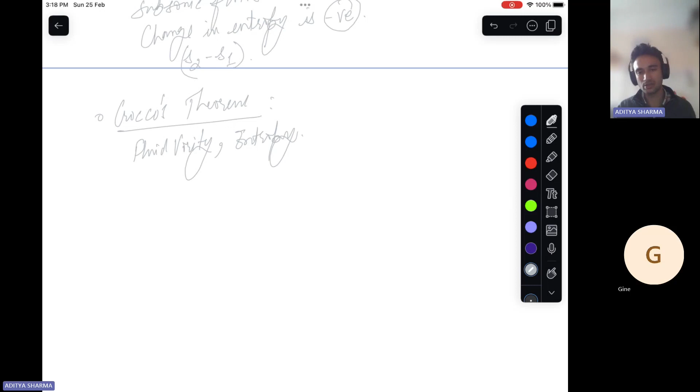The theorem mainly conveys that by just having these thermodynamic changes in the flow, we can predict the kinematic behavior of a flow. By kinematic, here we are concerned only with the rotationality or irrotationality of a flow. In the fundamental fluid dynamics course, we are introduced to whether a flow is rotational, irrotational, steady, or unsteady.

So vorticity is 2 times the angular velocity, and the angular velocity is this. I'm just writing the mathematical expression for this. Because we don't have any question based on these formulae in our assignment, we won't be practicing questions based on this, but we must know what these things are and be able to solve any problem based on these formulae. These concepts we should know.

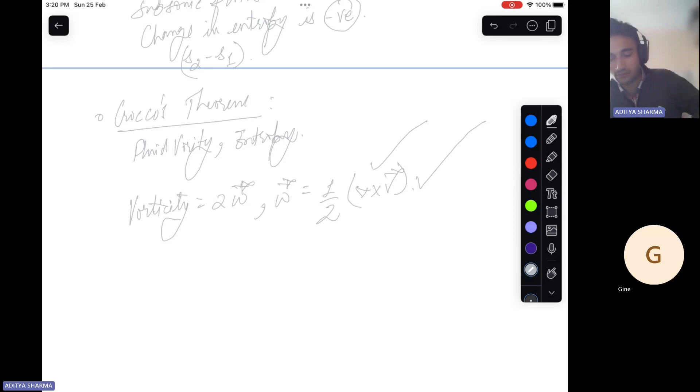Like the curl of velocity, how to find the curl of velocity, which is basically a vector operation. There is a cross product and a dot product; this is basically a cross product. We should know how to find a cross product so that we can move ahead if there is some problem related to this concept. Then there is this relation linked to this. I'll just write it so that we have an idea of what this equation looks like.

So this is the expression from Crocco's theorem. This is the enthalpy term and this is the entropy term, and we have related these with the velocity term. The velocity term means kinematics is involved in this particular theorem. This is the enthalpy term and this is the entropy term.

Then the gas property tables for normal shock relations were discussed. In week 4, we came across various relations related to normal shock waves. These were briefly pointed out in a slide at the end of lecture 12, and then a table based on those relations was presented by the professor. We have 4 numericals in assignment 5 based on these compressible flow and normal shock wave relations.

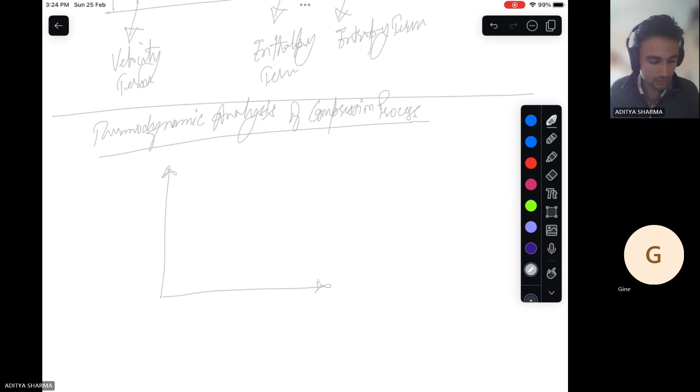Okay, so thermodynamic analysis of the compression process. Okay, right. So a graph has been given there, right? This was, I believe, the pressure and specific volume graph, and it was something like this. So it was something like this, right? So this was the polytropic process, being represented with this particular expression, right?

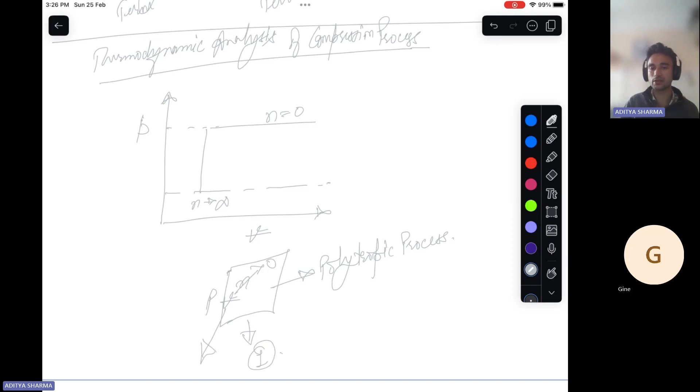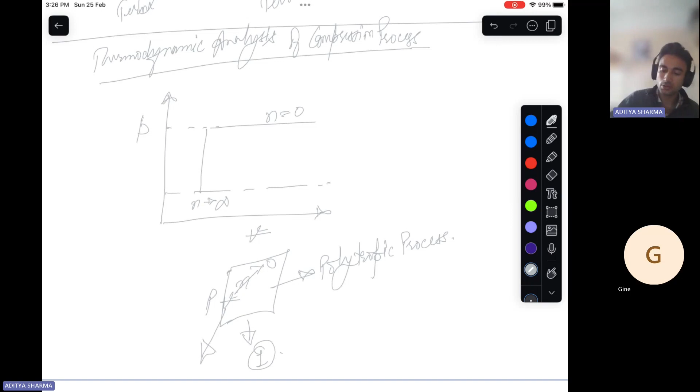So in that case, the value of n decides the behavior of the gas in the flow. So that has been discussed in this particular topic, right? So for example, if n is zero, then this whole term becomes one, right? So in that case, there is no use of including v in this expression. It becomes independent of v. So this expression corresponds to a process that is isobaric in nature. In this fashion, different processes have been discussed in this slide, right? Okay.

So like I was just telling, we have started seeing the shock wave as a compression medium. This has been discussed in this particular heading of lecture 13. And then the professor moved on to the Hugoniot relation, right? So the Hugoniot relation is basically nothing but trying to find the ratios of properties of the flow across the shock, upstream and downstream of the shock.

And one important thing about this Hugoniot relation is that here we are not taking help of either Mach number or velocity, right? So we are not using velocity or Mach number to get to the ratios of the properties upstream and downstream of a normal shock. So this is the Hugoniot relation.

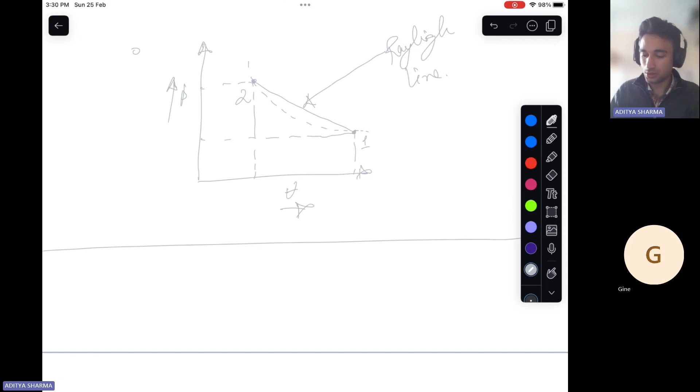Okay, all right. So now I believe we should move on to our questions, because this brief discussion of the topics covered has been done. Then the last topic was isentropic compression versus shockwave compression. In this, nothing special has been done. Graphically it has been shown how the two processes differ from each other, right? So if these are the two processes, the continuous one is the isentropic compression, and this one is the Rayleigh curve, right?

This one is a Rayleigh curve, with point 1 and point 2. The discussion we are having is only across a normal shock. So in this case, if there is compression, how the compression will be in the real case, and how it will be in the ideal, isentropic case, this has been discussed. All right. So let's move on to the questions.

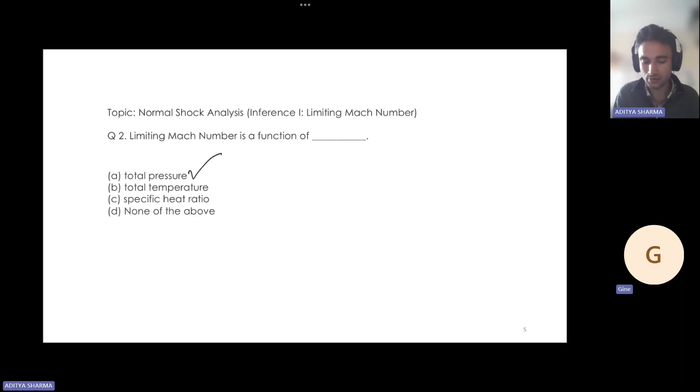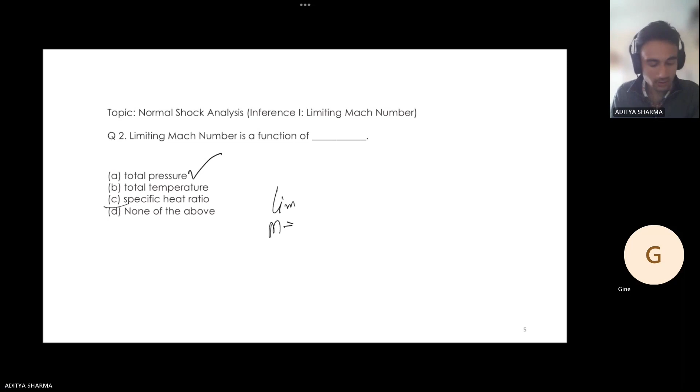Specific heat ratio, C. Okay, you say C. Right. So what is the expression for limiting Mach number? I have just mentioned it. For the sake of recording, I'll mention it again so that you can directly refer to this. So this is the expression, right? This is nothing but the specific heat ratio. So the correct answer obviously is C, right?

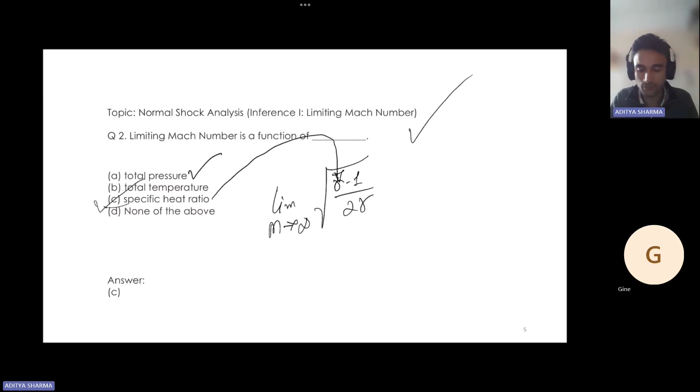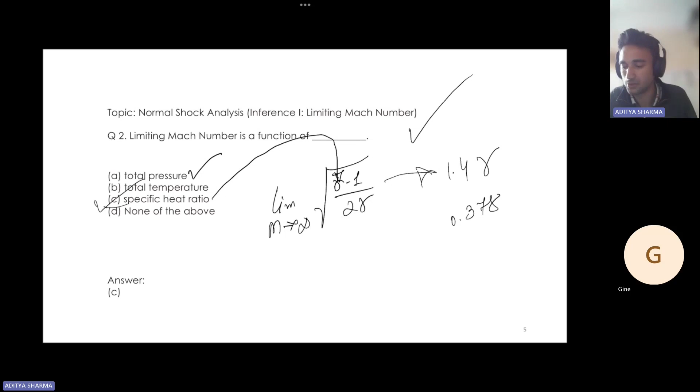Okay, so let's move on to the next question. So the thing is, you keep the Mach number at whatever high value you want, but there is one limit below which it won't be in the capacity of the strength of the shock to lower the Mach number downstream of the shock. So for a gamma value of 1.4, this is 0.378, right? This I have already mentioned. This also I have just mentioned.

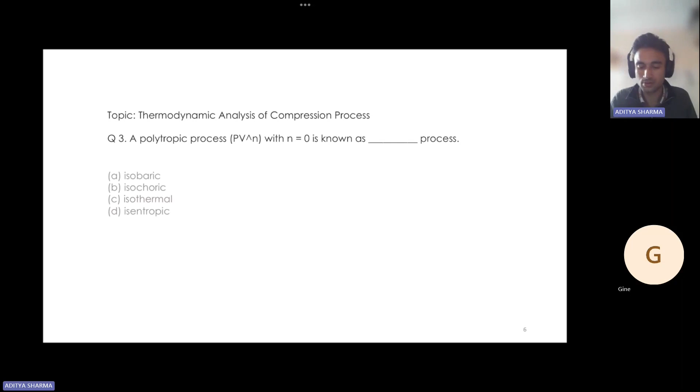So there are polytropic processes like this, and this is n equals 0. Let's suppose this is n equals 1, this is 2, and this is 3, right? And this is n infinity. So PV^n equals constant. This is the polytropic expression.

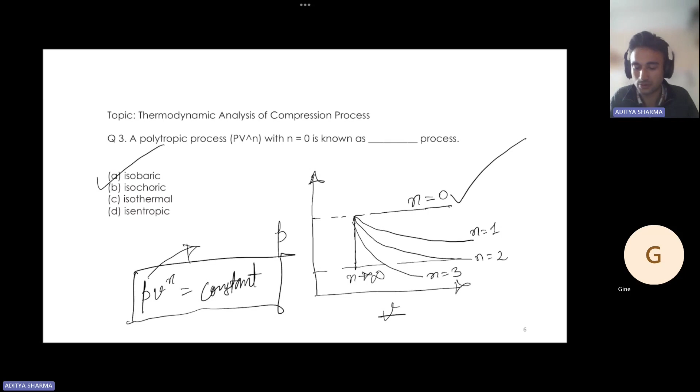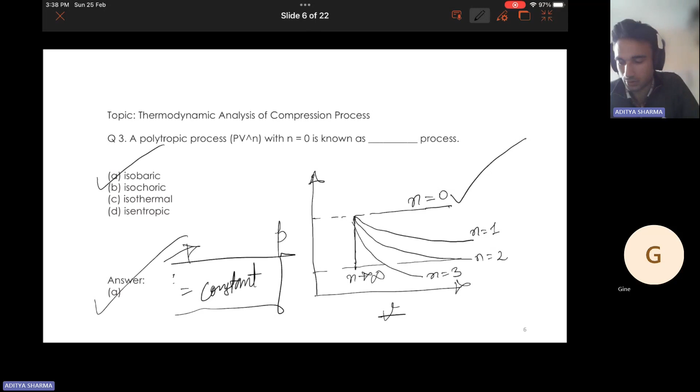So for this case, it will be A, right? Isobaric. So in this process, whatever the volume of the process, the pressure will remain constant. So this is our answer, right? You see this. Sir, A. Okay, right. Thank you. So, go on to the next question.

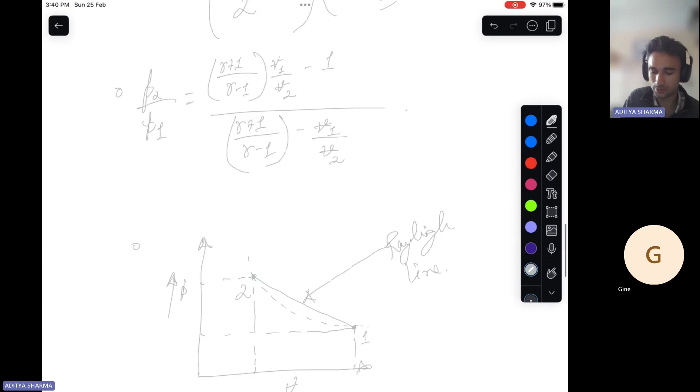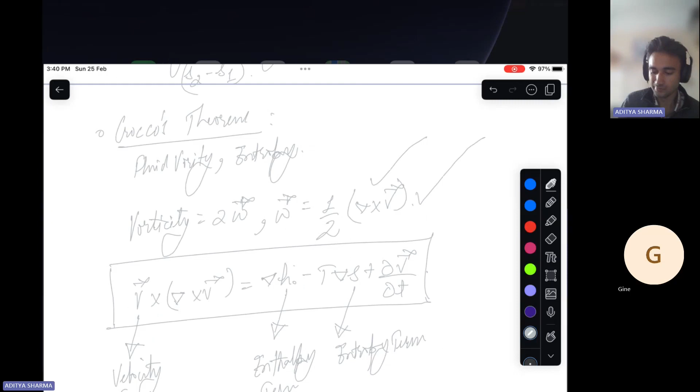So when the flow has a gradient of enthalpy and entropy, the flow will be rotational, right? We just saw this expression. This is Crocco's theorem. So D option is correct. Then let's move on to the next question.

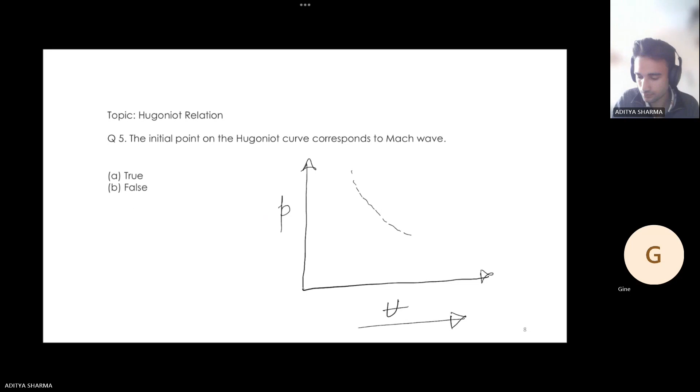Okay. The initial point on the Hugoniot curve corresponds to a Mach wave. Let me first draw a Hugoniot curve. All right. So this is our Hugoniot curve. With reference to this curve, the initial point will correspond to a Mach wave. Is this statement right or not? True. A. Right. So this graph I am showing for some random normal shock.

But we know that we get a Mach wave when the flow has just become supersonic, when the Mach value has just reached 1. So in that case, across this Mach wave, what properties change? These changes are very feeble, very weak. And on this Hugoniot curve, the initial point corresponds to the Mach wave only. So yes, this is also true.

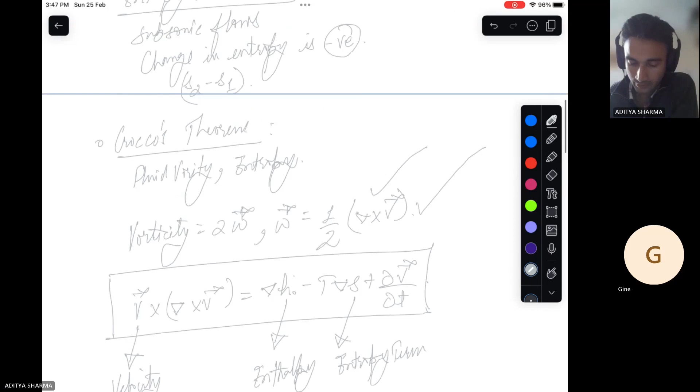Right. So I have just discussed also, right? So in a subsonic flow, the entropy decreases from this. I have not written it, but I should. Let's just write this expression. So this is question number 6, right? So the expression for this entropy change is Cp ln... this is some function of, or maybe I should just write some function of M1.

This is a function of gamma, R and M1, right? So this is this, but then if your M is less than 1, in that case s2 minus s1 will be negative, which is thermodynamically not possible. So this statement is false, and it is not possible to do so. Right? Okay.

Now, we have these numericals from question number 7 to 10. First of all, I want you to please note down these values, and based on that only we shall proceed further. So I'll also note down these values for question number 7 to 10. All right. So upstream of normal shock, values are given. V1 is given as 1500 meter per second.

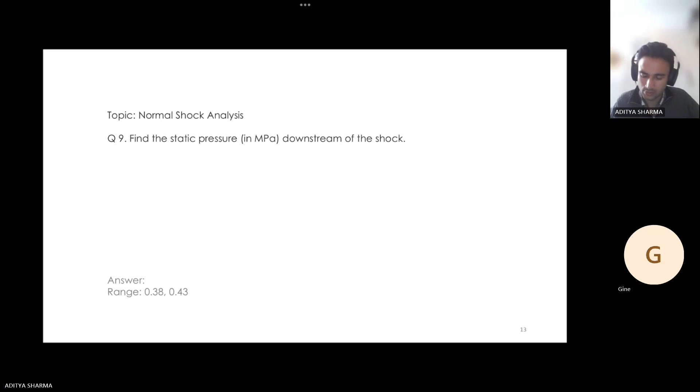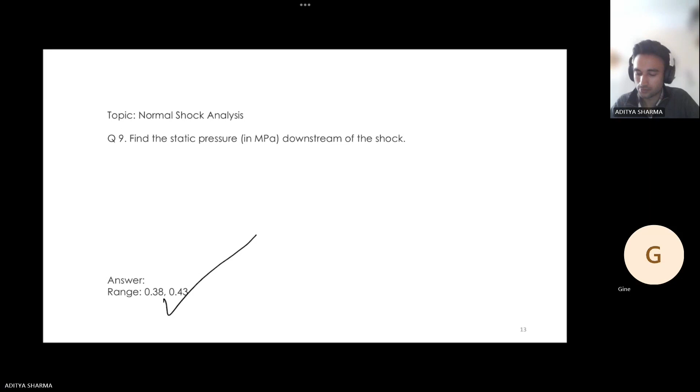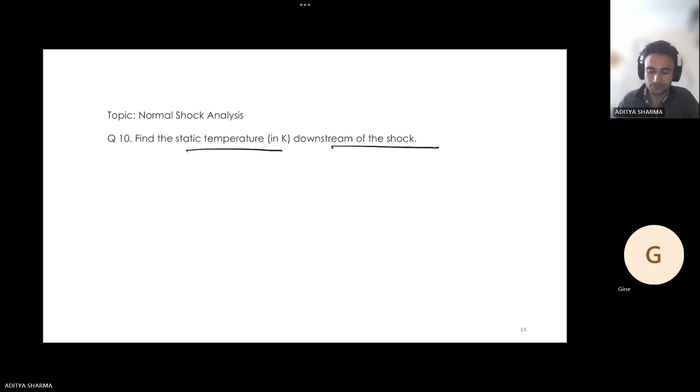So this was question number 9, and our answer fell in this range. All right, let's see the next question: find the static temperature downstream of the shock. Let's solve this. So how do we do this?

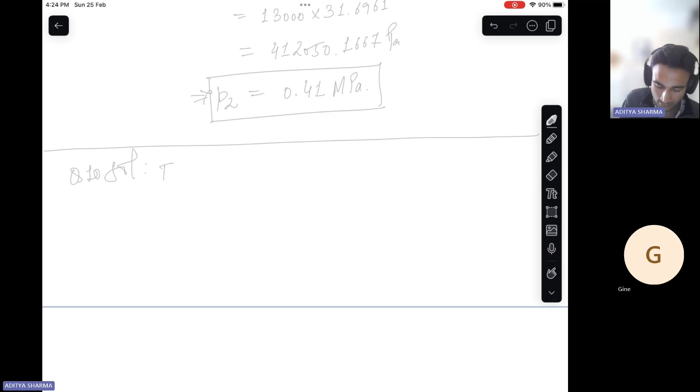Right. So we have this value of this expression, right? 1 plus 2 gamma by gamma plus 1, 2 plus gamma minus 1, gamma plus 1 square.

So T2 by T1 equals to 1 plus 2 into 1.4 by 1.4 plus 1, right? M1 square is 5.226 square minus 1, right? And then this is 2 plus 1.4 minus 1 into 5.226 square by 1.4 plus 1 into 5.226 square. Please let me know if there's some mistake in this particular expression.

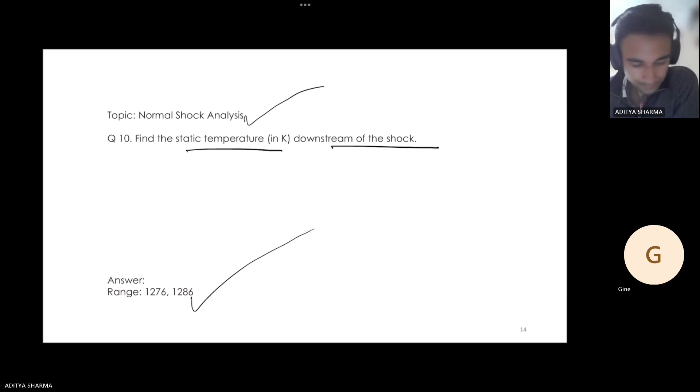So now we are done with 10 questions, right, of the session. So, all right. So let's move on to some extra questions, right? It's because there are 10 questions asked in your assignment. So I just prepared the first 10 questions and then I thought I should keep the additional questions in the next section of these slides, right? So

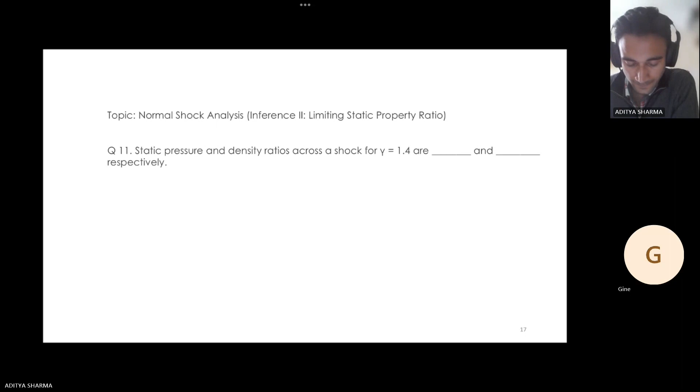we have this question from lecture 12, right? From lecture 12, the first lecture of this week, and from there, sorry, the first topic, right? So normal shock analysis, and from there also this limiting static property ratio topic. So the question is the static pressure and density ratios across a shock for gamma equals to 1.4 are

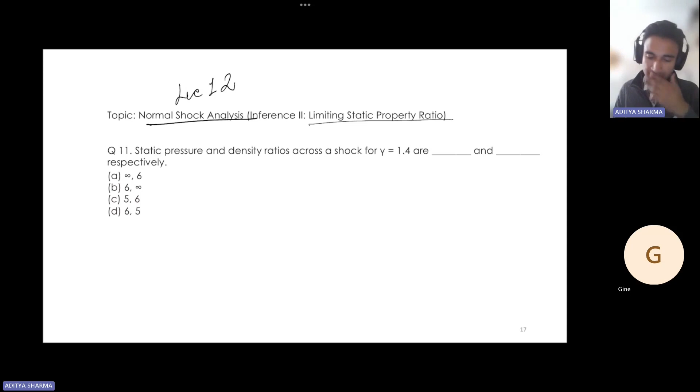So let's first of all see, because we are left with half an hour, so we can just, okay. So what has been asked? Static pressure has been asked, and static density has been asked. So I believe I have discussed these in the topics covered, right? So this is nothing but limiting pressure, right? This is infinity, and this is limiting what? Density.

So in any case, the ratio won't be beyond this value, right? So this is nothing but 1.4 plus 1 divided by 1.4 minus 1, which is 2.4 divided by 0.4, which is 6, right?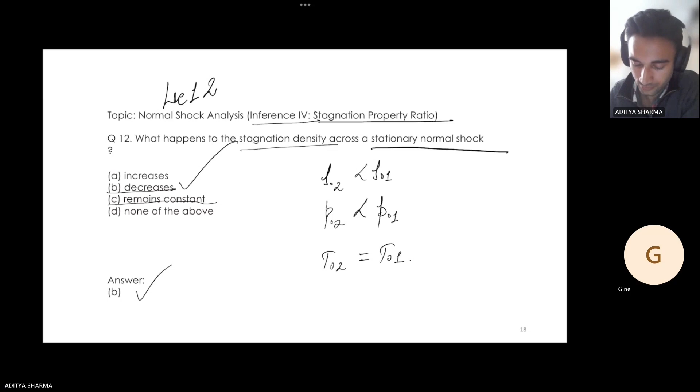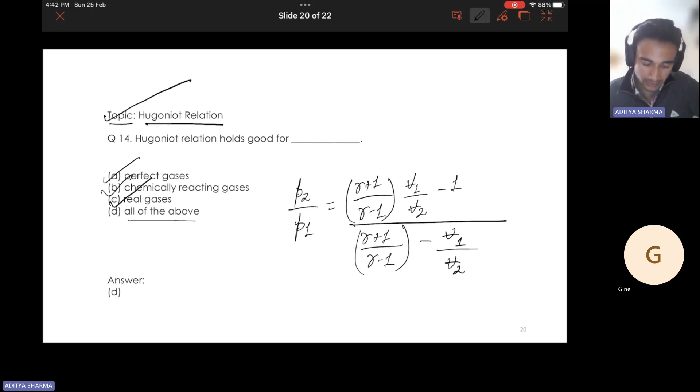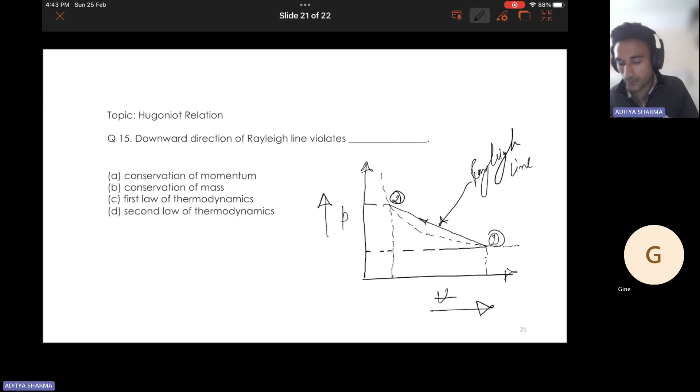Right. So this. So I have discussed this, right? So this is this. This is this. So this is the Hugoniot curve, right? This is state 1, this is state 2. And then if you join this, this is the Rayleigh line. Yes.

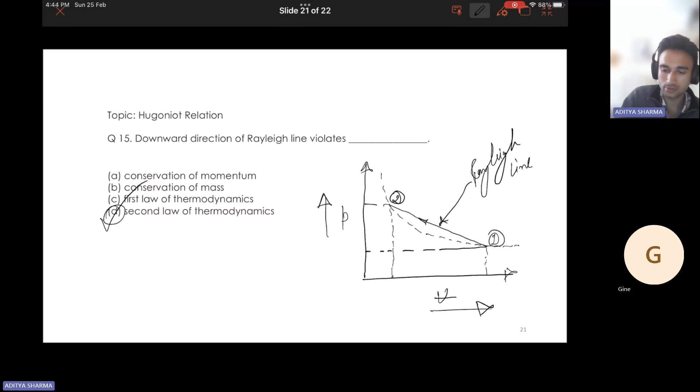Yes, what is the answer to this question? D. D, right? So you know this, right? It's from your slides only. The direction of this Rayleigh line matters, right? So it cannot be in the downward direction. So this specific volume has to decrease, right?

So this is in terms of thermodynamics: if the change in the state of a particular gas in the flow is in such a fashion that it moves from 2 to 1, then it violates the second law of thermodynamics, right? So this is it. So the D option is correct, right? So let's move on to the next question then.

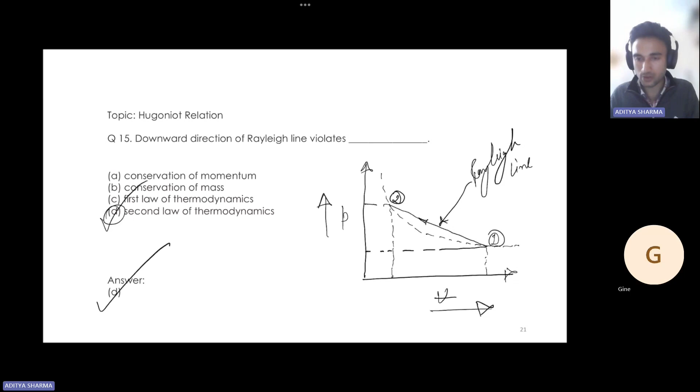So this is, I believe, the last question of this session, but after that we shall do one more numerical, because we are left with 15 minutes, right? So we shall solve one extra numerical, and then after that we shall call it off for today. All right.

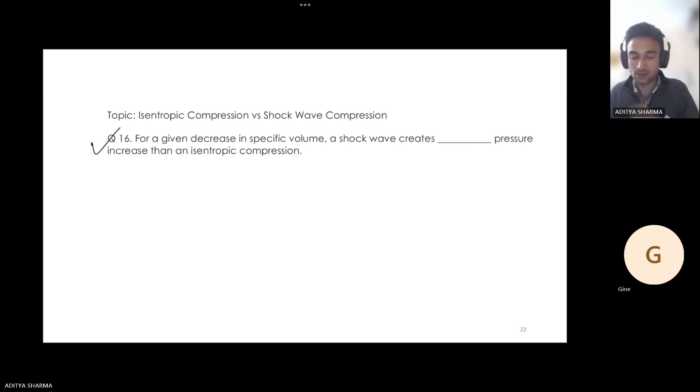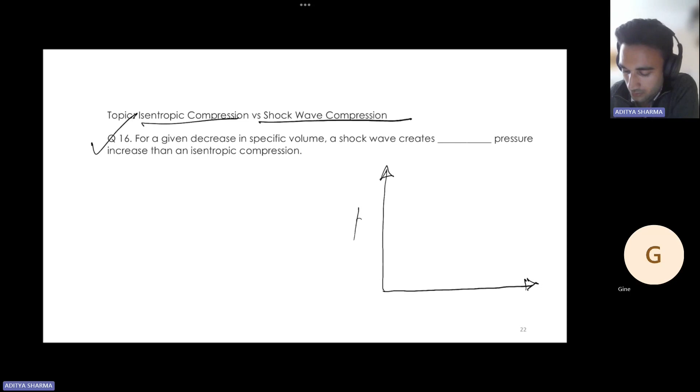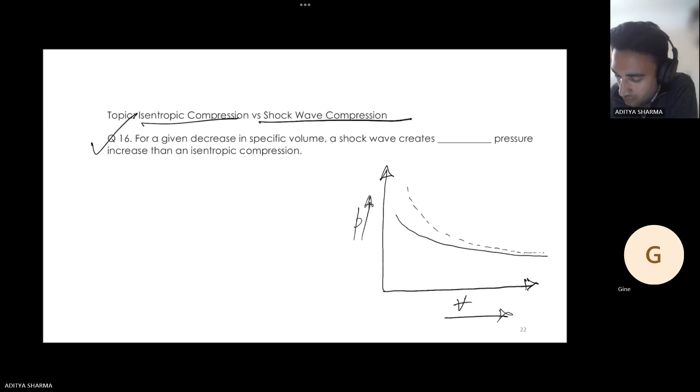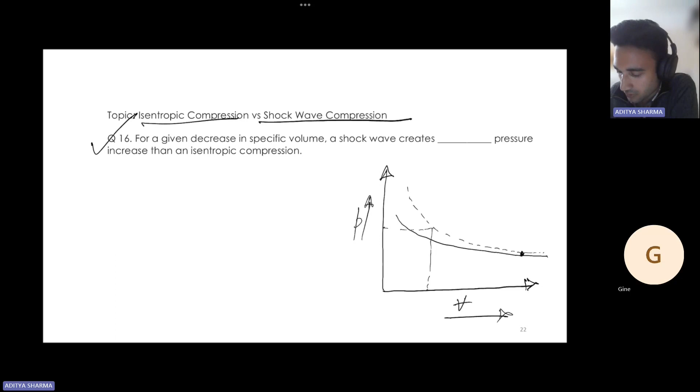So this is it. Question number 16. So the topic is isentropic compression versus shock wave compression. So as I've mentioned, right? This is pressure and here is specific volume. Something like this. So let's say they join here, right? This is 1 and this is 2.

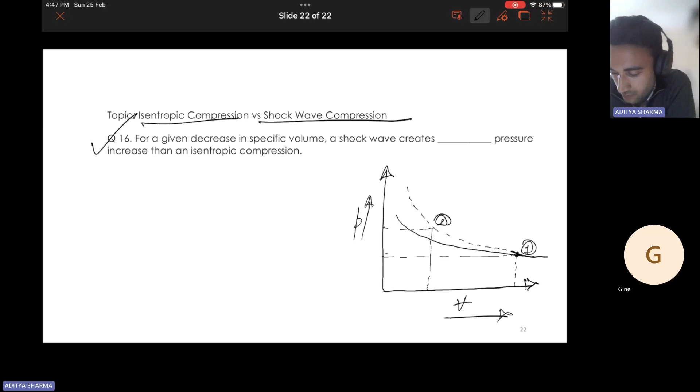So for a given decrease in volume, right? Let's say this is V1 and this is V2. So decrease in specific volume. Across a shock wave, we know there is a decrease in specific volume, right? So in that case, this shock wave will create a dash pressure increase, with respect to the isentropic case, for this Hugoniot curve. So we know this is the Hugoniot curve.

Hugoniot curve, and this one is the isentropic curve, right? So two curves are here. So if there is this decrease in specific volume from V1 to V2, then the pressure change, if we see these vertical lines for a particular specific volume: for V1, this cuts here, and for V2, this vertical line cuts the Hugoniot curve at this point, right?

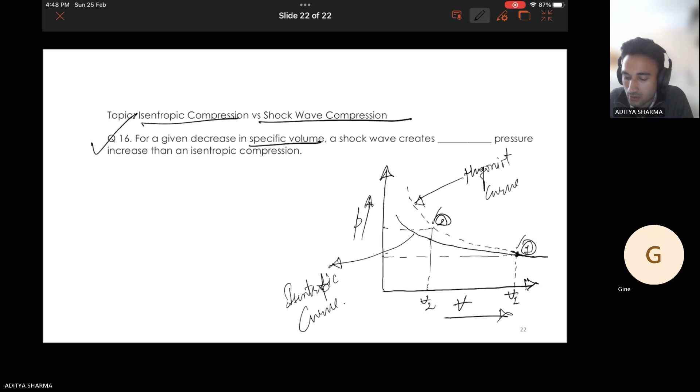And for the isentropic case, it cuts at this place, right? So for these two states, there are two different types of pressure changes. So I just rub this out. So either there is this pressure change, for the Hugoniot case, right?

Then for this isentropic case, this V2 line is cutting at this particular point, and this point on the y-axis corresponds to this point. This is the second state after the shock, and this point is before the shock. Before-the-shock points are common for both cases. So we have initiated from a common case, and then we are trying to see the pressure jumps for the two different cases, right?

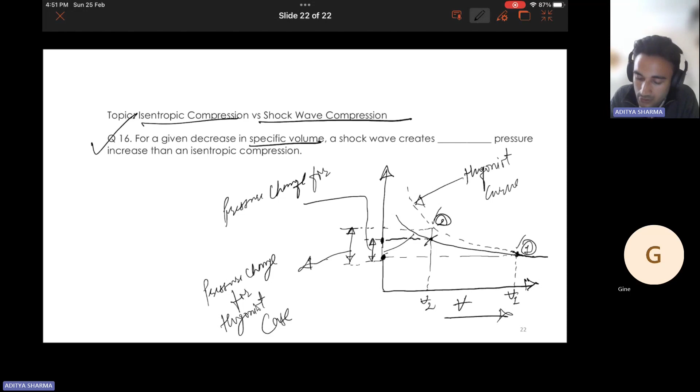So if we see this other case, this value is smaller than that. Let me just... so there are two cases. One is this and one is this. So this is for this, and this is the pressure change for the isentropic case. So clearly for the isentropic case, this is small in comparison to the Hugoniot case, right?

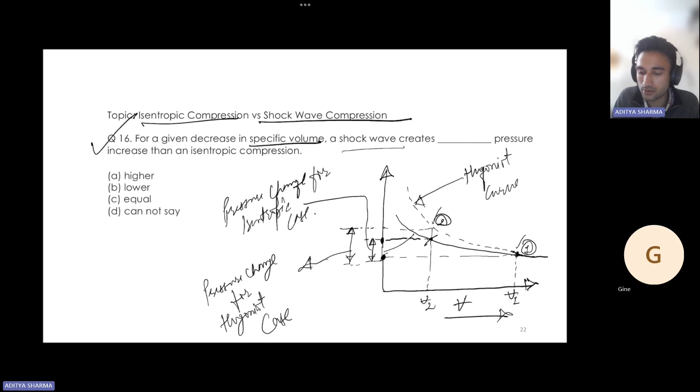So if you see the options, wait. So a shock wave, for the Hugoniot case, for the actual shock wave, will create higher or lower? Yes. Now you can comment on this. Higher. A. Higher. A. Right. Okay.

So I believe this is it as far as the prepared questions are concerned. So today we had a discussion on the normal shock wave, normal shock wave analysis. We discussed the topics related to the week 5 lectures, and then we moved on to some questions related to that. We did some numericals and some concept-based questions.